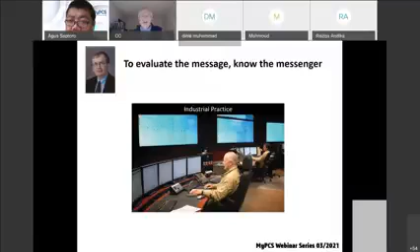In a transition between industry and academia, I spent some time at the Warren Centre for Advanced Engineering in Sydney, Australia, where we performed a one-year study on the benefits of process control and published a book. It was published by the Instrument Society of America, containing 7 industrial case studies, and it took about a year to complete.

Then I went to McMaster University as a professor in chemical engineering. This is a screenshot of the McMaster Advanced Control Consortium. A number of professors collaborate in this consortium along with about 20 graduate students, and we have joint projects with a number of companies. This gives students a great opportunity to interact with industrial practitioners and have case studies in their research coming from the companies.

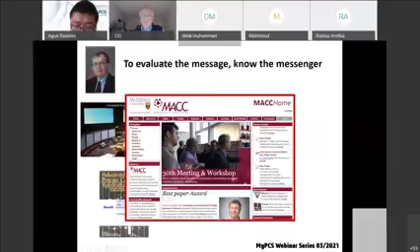While I was at McMaster, and since I've retired, I've been maintaining the Process Control Education website, where you can access my book and e-lessons and other learning materials at no charge. Some topics I'll talk about today are actually covered on this website, but not under process control—under process operability. So when I talk about issues like flexibility, reliability, and troubleshooting, there are chapters and PowerPoint slides, but you have to look under process operability.

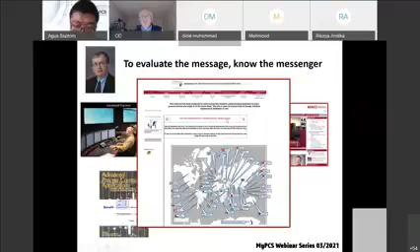What else keeps me busy besides maintaining that? Recently I've been working with Academics Without Borders. This organization goes to developing countries and works with young faculty members to help them build their research and teaching capabilities. That's one of the things I'll be doing next week, working with some groups on their research proposals.

So that's me. That's not the important thing. The important thing is the topic.

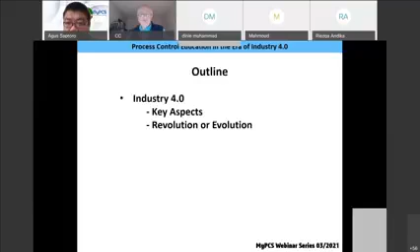In the outline, I'm going to first talk about Industry 4.0. It's a very nebulous thing, it's everything to everybody in some sense. So I'm going to try to pick out the key aspects that might be most important for chemical engineering, and then talk for a moment about whether we're in a revolution or an evolution in the changes to process control.

Then I'm going to talk about the education, and process systems engineering topics, not just control, but design, optimization, and data sciences, and how we can relate these topics to Industry 4.0. Then I'll try to summarize the status and some future steps we could take to improve the situation.

Because wherever we are, we can always do better. And of course, please continue to add your comments and questions in the chat.

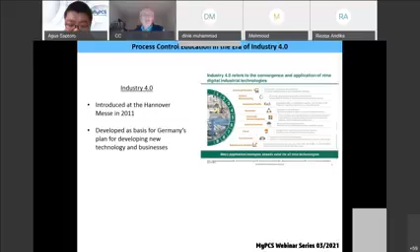Now, we'll look at these topics in a little more detail, but where does Industry 4.0 come from? My best research is that it was introduced at the Hannover Messe, a trade fair in Germany in 2011. It was developed as a guide to set the basis for Germany's plan for developing new technology and businesses. So it didn't come from the academic side, and it didn't come really from the user side, and it covers a very, very broad range of topics.

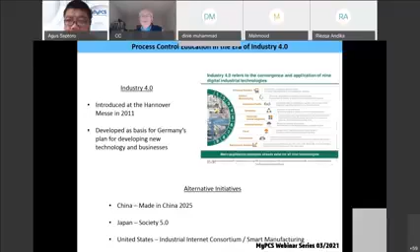There are alternative initiatives like Made in China, Society 5.0, Smart Manufacturing, and the Industrial Internet Consortium in the United States. So when we talk about Industry 4.0, that doesn't mean that's the only definition of what's in the future. We have all these others, and they're going to have to all at some point combine and collaborate, because we have to have systems that are compatible. We can't have competing software and hardware systems - they won't be interoperable.

Okay, so here's one take. This is from the Boston Consulting Group on what Industry 4.0 entails. And it goes, you can see, from advanced robotics to additive manufacturing, 3D printing, and so forth, all the way down to big data and analytics.

Not all of these are necessarily of interest to the process systems engineering community. Some may not even be in chemical engineering. So I'm going to highlight these items: simulation, and under simulation they include optimization - so using simulation for decision making, which can be optimization; the horizontal and vertical integration analysis of the plant; the Industrial Internet of Things, IIoT; and certainly big data and analytics. So these are the four things I'm going to concentrate on.

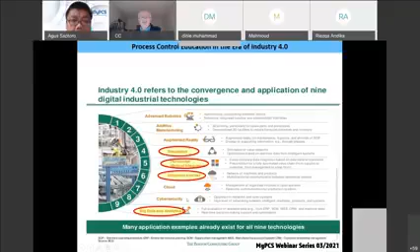Now, things like cybersecurity obviously are very important, but I don't think the chemical engineering community is going to be involved in writing the protocols for that, although we're going to be demanding that the security exists.

So let me relate those to a typical chemical process. First, we have the horizontal integration - that's from raw materials to final customer satisfaction. And Industry 4.0 also talks about customer feedback and dedicated customer product design, so you go in and they take your measurements and then build you a bicycle that fits you exactly. But this is certainly an issue in all of our plants.

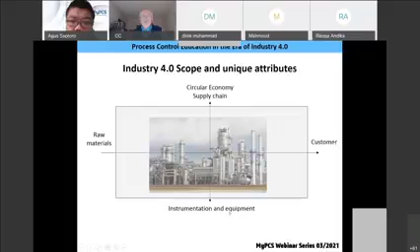There's vertical integration from instrumentation and equipment through supply chain, and they're even considering the circular economy where we collect materials and recycle them back. We don't stop at instrumentation here because now the equipment, the pumps and valves and so forth, will be smart - we'll have processors in them as well.

And to deal with this range of decision making, we're going to have to use optimization, data sciences, control, and simulation. And some of the key words: the Industrial Internet of Things, communication among various pieces of equipment using IP addresses; cyber physical systems, those are physical systems that have sensing and computation, not necessarily control, but computation at the individual physical elements; and in some cases, autonomous agents, although we probably have had that for 150 years with individual controllers that aren't talking to one another. This is going to be a decentralized system.

It's going to have to be interoperable, and that's a key term that industry people use all the time - in other words, we can mix the equipment and software from various sources into an integrated system without having to write special interfacing each time we put a new valve or a new pump into a plant. So interoperability from an economic point of view is extremely important. And the system should be modular and scalable, so we can start small and build up as our plant may expand, or as we transfer from older equipment to newer equipment.

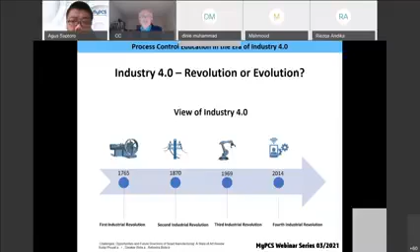But whether it's a revolution or an evolution really doesn't affect anything we're going to do in this talk. So I think there are three stages. We go back to antiquity and up to the steam engine, let's say. Control systems existed, but they were very few and far between, and it was not recognized that there was a common technology.

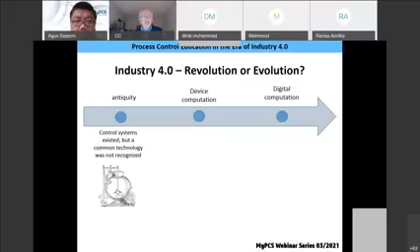It was built well before BC became AD, but that technology didn't develop very much, probably because we didn't need it at the time. So that developed slowly. When we were making pottery, we needed to fire the pottery and control the temperature in the kilns. There were little feedback systems, very clever systems, but they were individual artifacts.

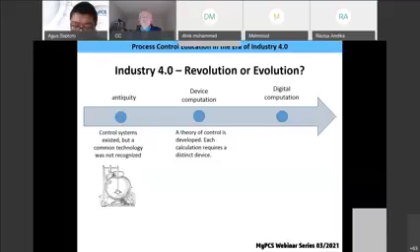Once we roughly came up with the steam engine, we started to develop machinery. We needed much more advanced controls, but each calculation required a distinct device. So that was an enormous limitation to control. However, it stimulated an enormous amount of control theory.

So if we wanted a proportional integral derivative controller, we needed to build an electrical circuit. And if we needed 100 of them, we had to build 100 electrical circuits. That was until we got to digital computation. Once we started to have that, programming opened up.

Simple PID, or MPC where you manipulate 80 or 90 variables—we can do that in the digital machine.

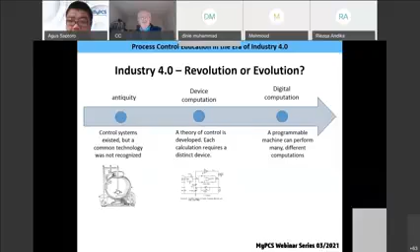So from my point of view, I differ a little bit from the developers of Industry 4.0. I say we're not in a revolution now, using the terminology from Thomas Kuhn and from The Structure of Scientific Revolutions. Thomas Kuhn was the person who coined the term paradigm shift that every manager in the world has overused. Thomas Kuhn talked about a paradigm shift being when Copernicus recognized that the Earth revolved around the sun rather than the opposite, or when Darwin developed his understanding of evolution. So we're looking for big changes, not small changes.

However, normal science is still important. That does not imply that developments are trivial or of any limited value whatsoever.

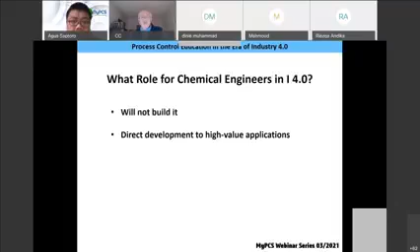Okay, so in Industry 4.0, what's the role of chemical engineers? We're probably not going to build it. We're not going to sit down and write the software or design the electronics for the interface cards or whatever. However, we have to be involved along with other user communities in directing the development to high-value applications. In addition, we're going to develop and deploy the decision-making methods, the ones we have now and the ones we're going to need in the future.

And we're going to emphasize security and safety. I have never met a computer scientist who understands how important it is to run plants safely and securely, and I've had bad experiences. I can tell you when I was in industry, computer scientists would run experiments in process control systems that were controlling plants, and sometimes we had incidents where we would lose $1 million or $2 million because of software errors they introduced just to see what would happen. So it's the chemical engineers who own the plant, and we have to absolutely ensure that the security and safety is provided.

I would say this is very similar to the introduction of digital control in the 60s and 70s. There was a period in which the companies building the new digital control systems weren't entirely sure what they were good for, and the operating companies weren't entirely sure what digital control meant. It took at least a decade to shake that out. The companies that were most successful were the control suppliers that worked closely with a number of leading operating companies.

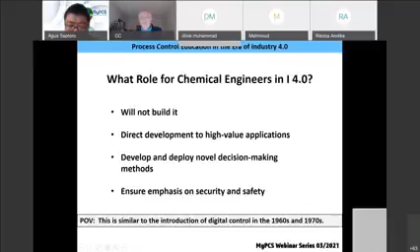Now, process systems engineers are going to be the ones who are going to be doing that for the most part.

So what is process systems engineering? It's fundamental modeling and simulation, process control, optimization, design, data sciences, which is usually not identified explicitly. I just looked at a couple of review papers on process systems engineering published in the last 6 months with maybe 15 authors across the 2 papers, and data sciences was not identified as a central part of process systems engineering, which I think it is central. And reliability is almost never included in process systems engineering, but it's a key technology and one of the reasons why we need Industry 4.0.

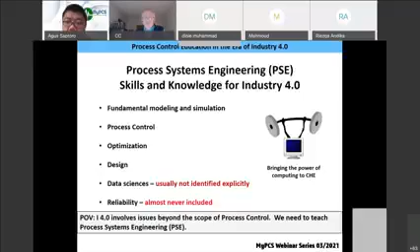So Industry 4.0 goes well beyond the scope of process control. We're going to need to teach process systems engineering to the people who interact with the I4.0 folks, and we're going to need the entire array of all of these technologies.

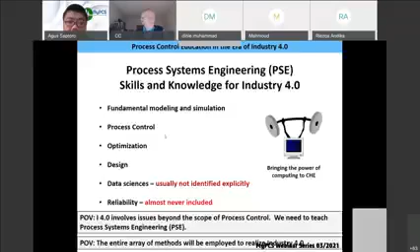So what about the students? This is an opinion, I don't have data on this. A large percentage of the students will need to apply one or more PSE methods in their careers. So even if they're working in biochemistry, they can use data science techniques learned in their undergraduate education. Or if they're going into business, say supply chain management, they're going to need optimization. Only a few percent, maybe 5%, will actually become process systems engineers and follow that career path.

So the principles for Industry 4.0 can be introduced, but not taught in such depth that it requires an additional year or two of training. While teaching the undergraduate topics, we can make the students aware of the needs — the kind of things we need in control, optimization, reliability and so forth — and some solutions that are easy for them to understand, so they'll be ready to adapt when they need to see the advanced technologies in Industry 4.0.

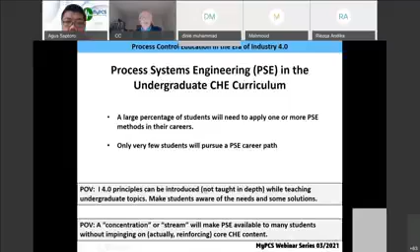The way to do that is a construct I'm proposing: a concentration or a stream that will make PSE available to many students without overwhelming the entire program or impinging on the core content of chemical engineering. After all, only a few are going to specialize, while a large number will require some PSE skills. And of course, while we're teaching this, we're going to be reinforcing the core content. So let's take a look at what that looks like.

I'm not going to show every course in the chemical curriculum — thermodynamics, heat transfer and so forth. I'm just going to show the PSE related courses. Here the yellow are the required courses: a modeling and numerical methods course in 2nd year, a basic statistics course that covers things like regression, design of experiments, a little bit of analysis of variance, and gets into some principal component analysis, so it includes some multivariate statistics in this basic course.

We have a flow sheeting course, an undergraduate process control course, which we all love and think is the most important course in the program, and we have another design course here — economics and process operability. I'll talk about that a little bit more in a second.

Now, there's a couple more required courses that have options. In this program, the design course will have several variants — one may have a biochemistry emphasis, another might have a polymer processing emphasis. There's going to be one design course, the project design course, that has a PSE emphasis. So we're going to have 3 design courses basically: flow sheeting with some sustainability, the project course, and then another course in the middle.

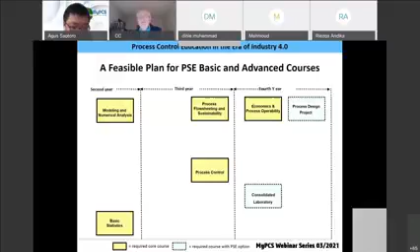Then we have some technical electives. This allows us to offer these courses, and not all students will take them. There are going to be some students who are in love with biochemistry or nanotechnology, and they don't have to take these courses. There's going to be an advanced process control course, a data science course, and an optimization course. Just to give you an idea, these courses average about 50% of the students take them as electives. So out of our class of 80 graduating, we'll have about 40 students on average across these 3 courses.

This gives us the ability to offer some really good advanced content in engineering to a substantial number of students who are very interested in it. One of the ways we sell this to students is to ask, do you know exactly what you want to do? Some will say yes, I want to cure cancer or build an artificial lung. Good. Most don't. So I say, if you don't know exactly what industry you're going into, or whether you'll emphasize management or operations, these systems topics are going to be of the most general value to you.

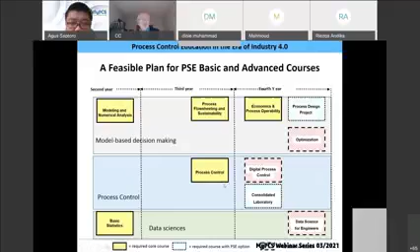Let's look at what's in these courses and what's in the courses now, and how we can teach them so that when students are involved with Industry 4.0, they'll know the principles that are important for engineering that carry over to the Industry 4.0 issues.

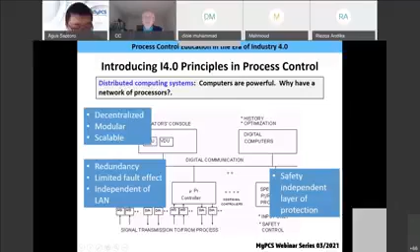We have an independent layer of protection. We know that in our safety hierarchy, every layer has to be independent. If we did the safety in the same computer where we did the control, we wouldn't have this independent safety layer. And we have the options for unique software and intensive calculations that are independent from the control computers.

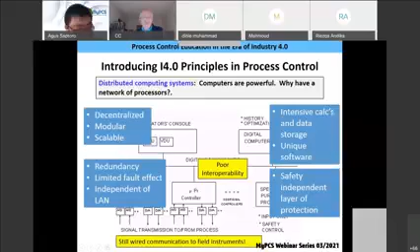There are some deficiencies. We're still wired, so we're still running miles and miles of wires. We can't do that with Industry 4.0. And we have very poor interoperability. If this is a Siemens system, for example, and you wanted to add one Yokogawa controller to it, the cost would be prohibitive. So once you buy one of these systems, you're pretty well stuck with one vendor, and with Industry 4.0 we don't want that to happen. So while we introduce this, we can show all the aspects of it that are important - the ones that are good and we want to retain in the future, and the ones we want to improve upon.

Let's look at a little more detail. This first sketch I'm going to talk about is a cyber physical separation system. This is the way we did it from probably the 1960s until even today. Some systems have this kind of structure, and certainly most of the installed base that your students will see has this structure, so we have to talk about it. That installed base is going to be there for 30 years.

So we have a digital computer, but then we have what we could call a dumb sensor and a dumb valve. What we have is only one variable being transferred in one direction, from the sensor to the controller - the cyber system, if you will - and one variable, the command to the valve, being sent from the cyber system to the equipment.

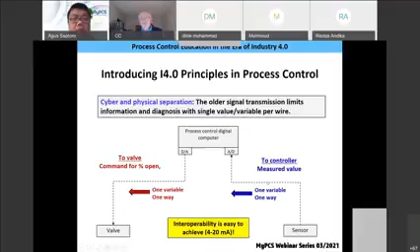Interoperability here is very easy. 4 to 20 milliamps is the standard around the world, or if it was pneumatic, even older, 3 to 15 PSI.

But we don't have really much knowledge about what's going on in the sensor. Is it functioning properly? Is the valve functioning properly? So we lose a lot with this kind of structure, but that's the structure most of your students will see if they go out into the plant today.

So let's look at a cyber physical system. With smart devices, this technology is certainly available and has been for probably over a decade, and it is used in industry a lot, but penetration, given the slow turnover of process plants because they're so capital intensive, isn't enormous.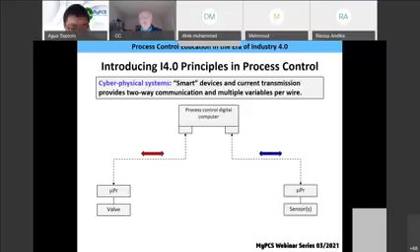Here we have a microprocessor at the sensor and a microprocessor at the valve. There are various ways this can be implemented, HART versus other methods, so I'm not going to get into the details of that. But once we have two-way communication, we can make calculations at the sensor. We can do linearizations, correct for changing process conditions, and have multiple sensors to calculate a variable.

And to the controller, we not only give the measured value, but we can give a diagnostic. Is the power supply working in the sensor? Is the power dropping off so that value might not be reliable?

We can, from the controller, send information back to the sensor. So we can calibrate the sensor, set the zero and the span and so forth. Just being able to do this, rather than having people go out to 1,000 or 2,000 sensors and calibrate each one individually, can save millions of dollars, certainly hundreds of thousands.

Now we have two-way communication. At the valve, we can do flow stem position linearization or other calculations. To the valve, we can send a command, and also a valve configuration like the data for the linearization or limits.

And coming back, we can get diagnostics. Did the valve actually move? If we sent a command to be at 50%, is the valve at 49, or is it at 38 or 22? So we can get the valve feedback position and other diagnostics on the air supply to the valve and so forth. This is a much superior system.

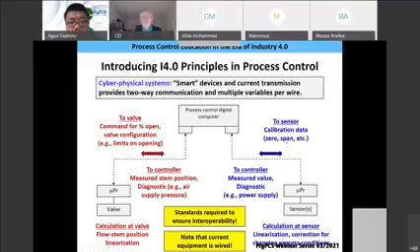Note that we're still hardwired. We're stuck with those wires right now, and that's an enormous expense and an enormous limitation. But again, once the students understand today's system, they can understand the capabilities and the shortcomings.

Now, from the process control system, what about the horizontal integration? When I teach level control, once you understand how to control level, you can put levels in series. These could be distillation towers or other pieces of equipment, each one having an inventory that's being controlled.

And so now we can introduce things like the feed push system. In some plants, we're pushing the feed in and it comes out whenever it wants. Now, this has some limitations.

In North America, we have a feed push system to distribute vaccines for COVID, and it's not a good system. Once we push some material to a bunch of hospitals, over here sometimes we have too little vaccine and sometimes we have too much vaccine. Now, of course, we're dealing with a command economy that's trying to satisfy each of the individual political localities, but it's not the best control system.

So another kind of control system would be a pull system, where we set the flow rate, the production rate, directly, and then we pull material in until we ultimately pull raw materials in. So now we have these two: we have a feed push and a product pull, and once we do that, we can talk about where we need these.

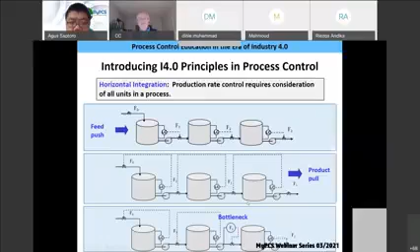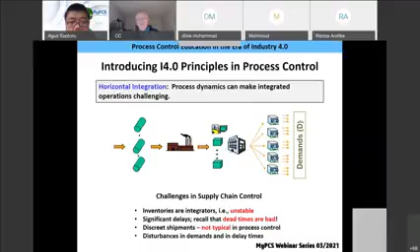So taking our level control lesson and going a little further, we get into horizontal integration. I'm going to skip over this a little bit, just to say I don't teach supply chain in a process control course. But once they can understand process control, they can see that if you have an open loop unstable system with lots of dead times, it's going to be a big problem.

Now, vertical integration, we talk about cascades. So we have a temporal decomposition, the slowest, the next slowest, and then the fastest. And we take advantage of that temporal decomposition.

I just want to point out that that kind of temporal decomposition can be implemented in MPC technology. It doesn't have to be individual loops. You can have individual models for all these variables and an integrated MPC controller that implements cascade control. I think Shell SMOC controller was the first to do that, but others are doing it now.

So once we start looking at the temporal decomposition from process equipment up through scheduling, for example, they'll understand the importance of solving fast problems and preventing disturbances from getting into the slower responding systems.

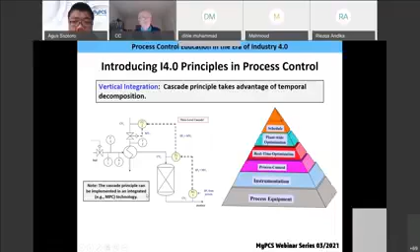But this remains an active area of research to integrate these systems. I don't want to imply that temporal decomposition is a solved problem, even though theoretically you could have the biggest nonlinear MPC in the world. In practice, it's not going to work.

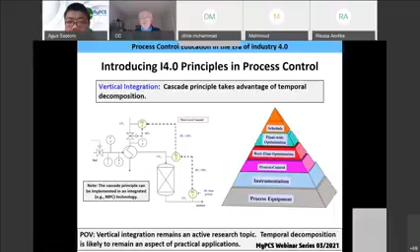Now, what about if we can't measure what we want to control, or the sensor is too costly? Here's a little flash system. We have a couple of heat exchangers, a lower pressure in the flash vessel. The liquid comes out the bottom, the vapor comes out the top. Most students calculate flash calculations in the thermodynamics course, but they never see a picture like this to say, what would it look like? What does the equipment look like? And I'm afraid our thermodynamics instructors are never going to do that, so it's going to be up to us.

Let's say we have this feed, some light hydrocarbons, and we'd like to control the light key as the ethane, but it's very expensive to put an on-stream analyzer with the analyzer house and the sample system. It could run $30,000, $40,000 capital easily.

So let's look for something that's related. Now, we can't do multivariate statistics in the process control course, but we can use our basic chemical engineering knowledge, although we're going to do the multivariate statistics in a little while. So we could use our chemical engineering knowledge and recognize that there's a relationship between the temperature in the flash and the ethane in the liquid.

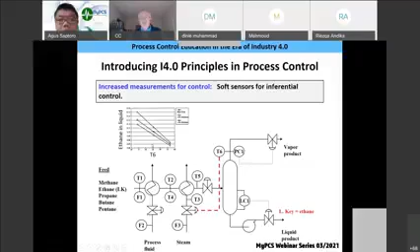And we can analyze that for the base case and for disturbance cases with different feed compositions. And while we know that isn't perfect, if it's going to control ethane within the acceptable limits, we can control the temperature rather than by the analyzer. And in many cases, in practice, we do that.

So once we've taught inferential control, the next step is to say, well, what if it's not obvious? What if from physical principles we can't find one or two sensors? What do we do? That's the next course, that's data sciences, and that sets them up for Industry 4.0.

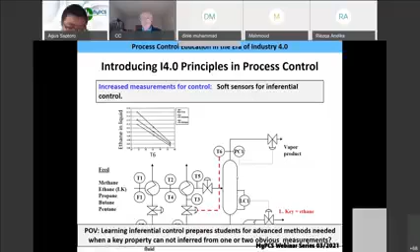And of course, if you get to the point where in the second course you can do centralized model predictive control, then we can look at the value of integrating the horizontal or vertical optimization decisions to get a better overall dynamic performance. So those are some ways that we can modify slightly our teaching and make sure we build the links to the ideas that are important for Industry 4.0.

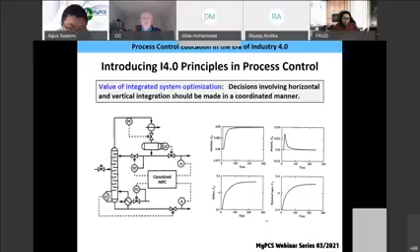Now, what about process design, the process design course? This is an alkylation plant. Don't bother with the details. We have two feeds coming in, a C4 and a mixed olefin stream, and we're going to make an alkylate, and we're going to blend the alkylate then with other components and make some gasoline. It's not a very straightforward process. And if we had time, we could talk about it and talk about the control and everything.

But let's just talk about one thing, operating window. When we're talking about the horizontal integration of a plant, we have to know what the capacity is for each unit, and then what the capacity is for the integrated plant.

Let me go back. We're going to look at some flexibility, changing the production rate and octane of the gasoline, because we have different octanes that we're going to sell.

This is the operating window for that plant. The reds are infeasible, the blues are feasible. This is the blended flow rate in barrels per day, or barrels per batch, and this is the minimum octane, which is basically what we're going to run at with an optimized blend.

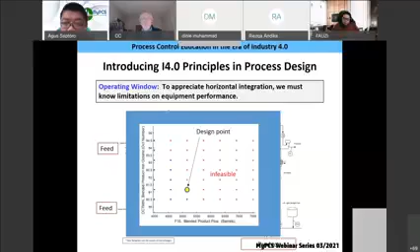Now, just because the operation is feasible does not mean it's a good idea. So there's something called the integrity operating window. The green area is safe operation, good operation, and we want to keep our targets within that.

Then outside that, we're going to damage the equipment. We're going to damage it slowly. Failure occurs with sustained operation in this region. And if we go further out, this could be pressures or temperatures or whatever, failure occurs very quickly. Out here, we could have loss of containment, the vessel would break.

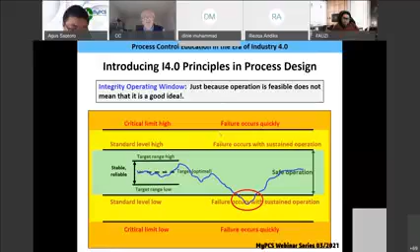Now, if we have some operating data, we have data that looks like this. We see that we've gone outside the green zone, and every time we go outside the green, we're going to accumulate some damage. The more damage we accumulate, the sooner the equipment will fail. So the integrity operating window is smaller than the operating window.

So let's look at an example. Here we have the head curve, head versus flow. This is a normal head curve for a centrifugal pump, constant speed. We teach these to our students all the time.

And we have the best efficiency point. So we tell the students you should run at the best efficiency point, and all the engineers know that. The problem is a lot of engineers run the pumps at low flow rates. Well, it's still on the curve, so what's the problem?

Well, the problem is this is the reliability curve. And as you get away from the best efficiency point, you're going to have very low reliability. So you're going to have low flow cavitation. You're going to damage the impeller so that rather than running 5 or 6 years, this pump over here is going to run 1 year and then it's going to break. You're going to damage the pump.

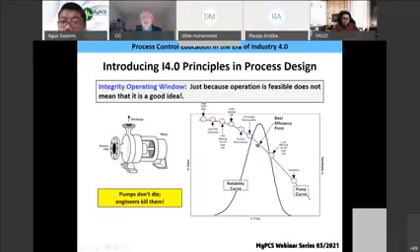So there's an old statement: pumps don't die, engineers kill them. And engineers kill them because they don't understand how a pump works. They've been shown this curve, and that's all they know.

So when we're teaching design, we want to make sure that we teach reliability. In this particular case, if the plant is going to operate at low flows for any sustained period of time, we're going to have to build a control system to prevent the low flows going through the pump. We can do that simply by adding a recycle, and that's very commonly done.

Now, if we're down here for 5 seconds and come back again, that's not going to be an issue. But if we're going to be here for sustained time, we're going to have to add some control systems to prevent that from occurring. So when we're teaching design, we teach reliability.

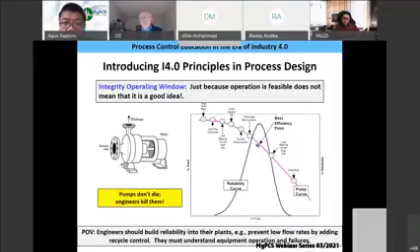We start building what's needed for Industry 4.0. Now, as far as maintenance is concerned, this is a little decision tree that was adapted from NASA.

And down here are final decisions. Let's just talk about the final decisions - if you have extra time later on when you're viewing this, you can stop it and read all the decisions. We can run to failure. Now, we do that with light bulbs in our home, and that's no problem. If the light bulb fails, it's not a main problem. That's not good for most process equipment, but perhaps for some it is.

Then we have design to prevent damage so that we extend the life of the equipment. That's simply like the pump we just talked about, having a recycle around the pump.

Now we have preventive maintenance, interval-based. For example, in your car, you might change your oil every 12 months or 10,000 kilometers, or whatever it happens to be. Spark plugs, 100,000 kilometers.

What if you've got 100 pumps in your plant from different manufacturers, different sizes? How do you manage that whole system? You need the industrial Internet of Things. You have to know how much time each machine has been in service, when it was maintained, which parts were replaced, etc., for all your 100 pumps. In addition, you have to know that for all your valves, compressors, and sensors. Obviously, that's not something you want to do with 3x5 cards. So there's an opportunity for the Internet of Things to improve preventive maintenance.

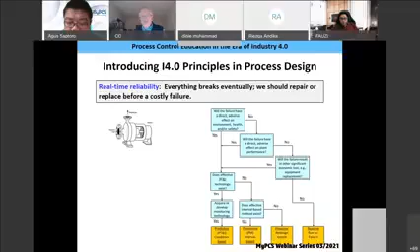Now, what about predictive maintenance? We have equipment, and we don't want to do this on an interval basis. Something may go wrong at any particular time, and we'd like to know if it's an incipient failure. It's going to fail in the future, but we'd like to know that so we can schedule maintenance before any damage occurs or any lost production occurs. So we can make a smart pump.

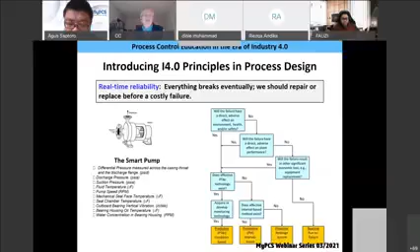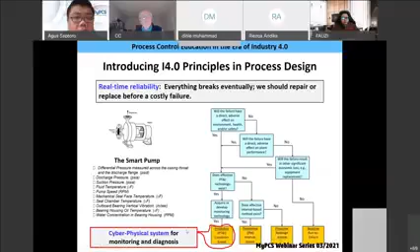We can measure all these things in the pump, put a processor on it, and have it communicating in real time with the Internet of Things system, the Industry 4.0. So cyber-physical systems for monitoring and diagnosis are obviously very, very important. We can introduce these for some obvious ones. Later on, we're going to talk about the data sciences approach to this.

And finally, one more example of cyber-physical systems: most equipment can be enhanced with measurements and computation. This is a chiller in the McMaster boiler house. We're really cold here in Canada, so we have boilers, and occasionally it gets warm for about a month and a half in the summer, so we need air conditioning. We have these industrial chillers, and we send the cold water to all the buildings from a centralized control room.

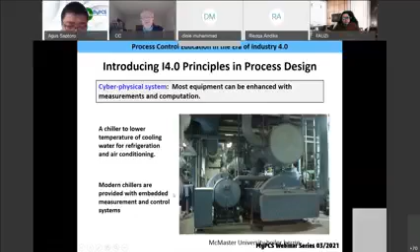We use this as a chemical engineering laboratory, depending on the instructors. When I was teaching some of the design courses, students would come in here and learn about equipment because it's industrial scale, and you can walk around and touch it. So this chiller is just cooling water for air conditioning, but modern chillers are provided with embedded controllers. What we want to tell our students is there are business opportunities—whatever you're building and whatever you're doing, there's a business opportunity for making it smart and beating the competition.

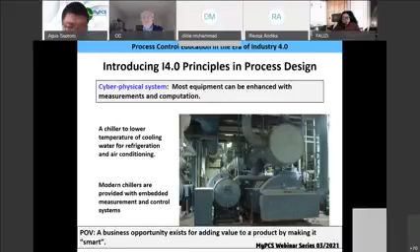Okay, so another topic in design that we teach is troubleshooting.

I remember when I first went into industry and looked at some drawings, I said, my God, why are we measuring all these things? So I would go find somebody older than me who knew, and I'd say, why are you measuring this? Why are you measuring that? Pretty soon they got tired of me and wouldn't talk to me for a while. But we need those measurements so we can monitor the health of the system.

We measure delta pressure across the trays so that, even though we can't look inside, we can infer the hydraulics—the liquid and vapor flows in the tower—in different sections. We're also measuring pressure here, even though there's a pressure controller, because we want redundancy. Pressure is the key variable, so we want redundant measurements we can compare.

A tray temperature—this isn't a heat exchanger, so why are we measuring temperatures in the middle of the plant? Well, of course, there are inferences: if it's a boiling hydrocarbon or boiling multi-component system, that gives us an inference of the composition in the tower.

And we can measure the liquid level in the condenser. Why would we do that? Well, this is a flooded condenser, so we cover part of the heat exchanger with liquid, and that changes the heat transfer duty. If we want to condense more material, we reduce the liquid in the condenser, giving more area for condensing. If we want to condense less, we close this valve a little and fill it up a bit, giving less area.

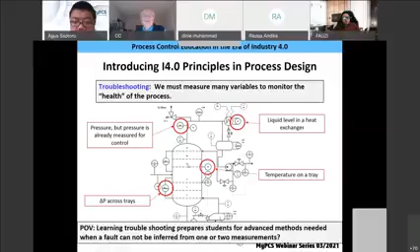So we need all of these sensors to monitor the health of the process. Once we understand those basics, then what if there's a fault that isn't obviously sensed by one or two sensors? Well, that sets the students up for the advanced technology in Industry 4.0.

I'm going to spend just a couple of minutes on this troubleshooting because I think it's an important aspect of education that is not given enough attention. The University of Michigan, Fogler teaches this, and we've spent a lot of time at McMaster developing the teaching approaches.

So if we have a current state and we think there may be a problem and it's not time critical, we're going to do our troubleshooting, we're going to fix it, and we're going to return to operation. If it's time critical and it's only moderately time critical, we're going to go to a safe park situation. There's been a lot of research done on what a safe park is, but you could think of it as reducing temperatures, reducing production rates so that the equipment is in a more stable operation. Go ahead and troubleshoot, fix the problem, return to normal operation and go.

Or if it's highly time critical, we're going to have to shut the plant down. There's something really wrong. The pipe is broken. We think there's some material, some fuel that's being released. We've got to shut it down immediately. Then we troubleshoot, then we fix the problem, and then we have to start the plant up again before we return to normal operation.

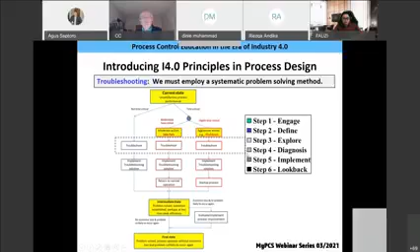And then the troubleshooting follows one of any number of different troubleshooting approaches. We use the 6-step Don Woods approach, but there are other ones around, and this one certainly works very well for us. For example, we have maybe 30 or 40 cases that we use in teaching. So this is just a little example, one of the simpler ones, I'll run through very quickly.

This is a physical system. We have some liquid in a tank where we have 2 pumps. We have a spare pump, of course, because if we need reliability, we need a backup, and one of them will be in operation at a time. And then we have a flow control that adjusts the valve here. And we have pumps A and B.

And so we would tell the students, they work in groups on these problems: Pump B is working very well, and we can see the flow is at its set point, and the controller output is in its range between 0 and 100. So that's what's being sent out by the controller. And we're very happy, everything's working great.

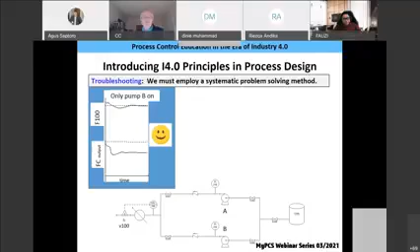Now we come along and the maintenance engineer says, I want to turn B off and run A for a while so we sort of balance the amount of time in operation for both pumps A and B. We don't want to run B all the time until it fails. We turn on pump A and turn off pump B, and things don't look good. The controller output goes all the way up to 100%. It's a fail-closed valve, that means it's fully open. And the flow isn't getting up to the set point.

And then we ask the students to troubleshoot this problem. They can ask questions, and they'll be given succinct answers to reasonable questions. So they might ask, is the liquid here down too low and we're sucking air or vapor into the line? And then we'd say, okay, well, we just looked at the level sensor, and the level is at 70%, and the takeoff is down to 5%.

Then they might ask, well, what about some of the valves here? So maybe somebody forgot to open one of these valves. And we come along and say, no, all the valves are open. And then ultimately, through the troubleshooting, they would conclude that the operators left these two isolation valves open, and the one-way valve here has failed, and it's failed open.

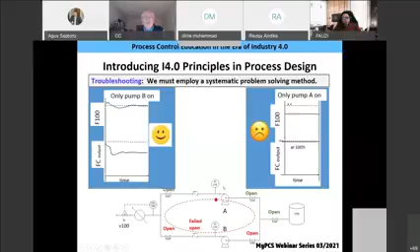So what we have here is a circulation. A lot of the liquid, rather than going out in this direction, is circulating around and around. We're losing head in the pump, and we can't pump as much material as we want. So these are the kinds of things that happen in troubleshooting.

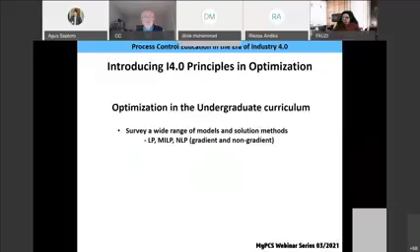So we'll move on to optimization very quickly. The optimization course looks at a wide range of models and solution methods: LP, MILP, NLP. It emphasizes converting the problem statements into solutions. We make use of available software tools like Excel, MATLAB, and GAMS, and really emphasize explaining solutions in engineering terms, sensitivity analysis, and so forth.

And the students, once we get to projects, the students are allowed to define their own projects, and they love that.

So what's the first problem that almost everybody does? Even mathematicians do this - they do the gasoline blending problem. That could be because Exxon Corporation, way back in the 50s when they were known as Standard Oil, published a book on linear programming before most engineering faculty knew anything about it, and one of the problems was the gasoline blending problem. It's become famous, I guess. It's an interesting problem in its own right, and certainly important for chemical engineers. So that's nice for us, bad for the mathematicians.

So the first thing we do is we give them a simulator of the system, and we say, okay, I want you to make 7,000 barrels of gasoline meeting these specifications and maximize profit. It sounds like a pretty easy problem. There are specifications, maximum and minimum, octane, RVP, and volatility, and with a simulator you think you could do pretty well. We give them half an hour, and most of them will find a feasible solution. Almost nobody finds the optimal solution.

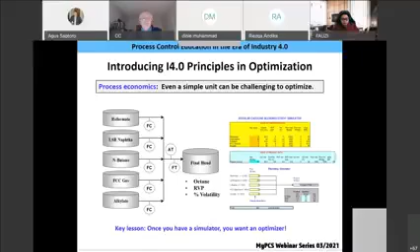What's the lesson? Once you have a simulator, you should want an optimizer, because you don't want to run thousands and thousands of cases to find a good solution. So optimization is essential for the full benefit of the models that we all have. That's an important lesson for them.

We want to be able to explain their solutions and look at sensitivity. So for that blending problem, if we change the production rate from the base case down and up, at a certain point going down, the system becomes infeasible. And going up to over almost probably 8,000, it is feasible. So even a simple unit can be a challenging problem.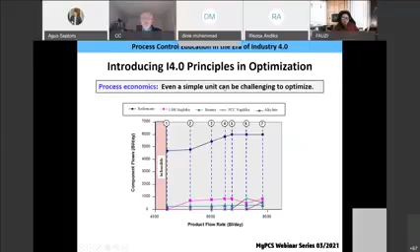And here's, again, a horizontal integration problem. This was a very, very simplified petroleum refinery - a project that the students would solve in about 3 weeks' time. This is a crude distillation unit, a reformer, and a catalytic cracking unit. So it's a very, very simplified problem. They have various feeds that they can buy, and they have different operating conditions, and this was set up as a linear programming problem.

So this is the kind of problem that enables them to think about operating several units in sequence in an integrated manner. We see that some of the materials can either go into a product or into a reactor and then to products. Really important for them - if they're going to deal with Industry 4.0, they need to understand operating decisions.

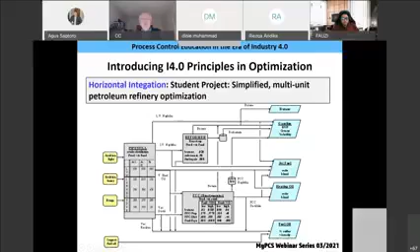Now, data science - luckily with data science, the advanced course does regression, principal component analysis and partial least squares, cluster analysis, and neural networks. So a very advanced course really for an undergraduate level engineering, again emphasizing converting problems into solutions.

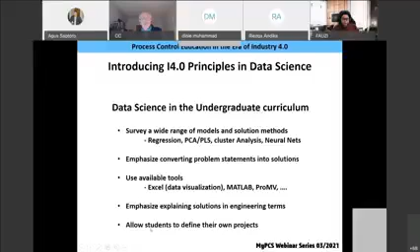Available software is Excel, MATLAB, ProMV, which is a product, a spin-off product from McMaster. It's a commercial product, and it's also the basis, I think, for some of the work that's done by Aspen Technology. Again, emphasizing the solution, explaining the solutions, and allowing students to define their own projects, which is very critical for the satisfaction of the students.

So we need to build a model that suits the application. We need causal models for optimization and for process control, and here we need to have a cause-effect relationship. When I change this valve of the fuel, I need to know the effect on temperature out of the heater. When I change the flow of normal butane, I need to know that effect on the octane, the vapor pressure, percent volatility, and so forth. These have to be causal models.

So when you're building data-based models, in some cases they're going to be causal. In others, they're correlation-based models, sometimes called prediction models. So for an inferential soft sensor, when we build soft sensors, when we do process diagnostics, we need correlation-based models. The distinction here is really critical, and for some reason it takes a while to get people to understand. I have seen industrial cases where people have built correlation-based models and then tried to use them in optimizers, and found, gee, the results were going in the wrong direction - we're not optimizing the plant.

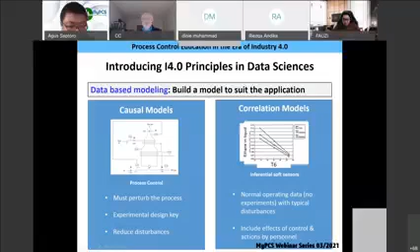We have to take the data under the conditions in which it's going to be used in the future. So if there are control systems and actions by personnel, we can't avoid those. We can't turn off the controllers. They all have to be in there when we're building these models.

So reduced-space models are really easy to understand if you're talking to a process engineer. If we had 1,000 sensors, how many directions, how many independent things can happen? Well, the feed flow rate can change, the feed composition can change, maybe the cooling water temperature can change. This is really a low-dimensional system. Only a few things can change.

And if we went from 40 sensors to 100 sensors, the complexity of the plant is not changing. So we know we should be able to represent this with a few variables, but not a few measurements, a few latent variables.

In the data I'm going to show you, there were about 40 measurements on this distillation tower. Now I can't draw in 40 dimensions, so I'll draw in 3 dimensions and show data that are in 3 variables, but the data really falls in a plane of 2 dimensions. So even though there are 3 measurements, the data is highly correlated. In reality, the data from these 40 measurements would go down to, I think, about 3 latent variables.

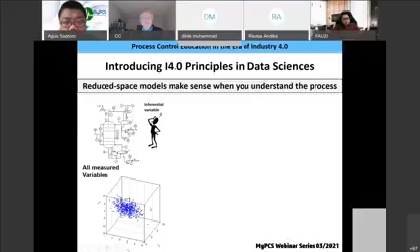So using multivariate statistics, we can determine the latent variables and look at our operation in that latent variable space. And then we can build an inferential model that uses all the measurements to find the latent variables and relate the compositions to the latent variables, and ultimately to all of the measurements with different weightings.

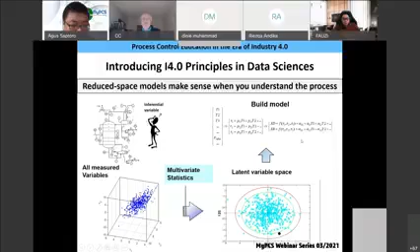And does that work? Sure. This is if we didn't have any inferential control. This is the percent benzene in the feed, so that's a common disturbance. And this is the deviation from 0 between the actual and the predicted product quality. So this would be perfect - that black line is perfect. If there were no inferential control, we'd have big deviations.

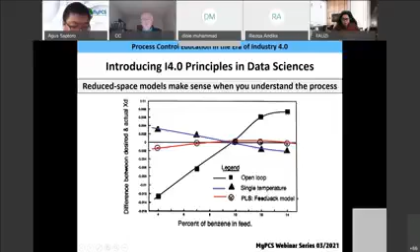If we use 1 temperature, we would get this line, and the red line, much, much better, is using multiple temperatures, using the multivariate statistical model.

Okay, so in summary, what are we doing reasonably well? Math modeling and simulation, especially flow sheeting. Introduction to advanced methods and tools, especially if you have these courses in place - process control, optimization, data sciences. Open-ended projects and advanced courses. We're doing all of these things reasonably well.

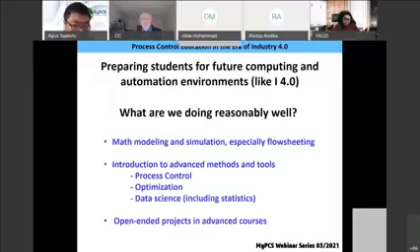What can we do better? The complexity of plant-wide operation and control, vertical and horizontal integration. To a great extent, our design courses do flow sheeting and cost estimation, but they don't talk about how these things operate. We need to think about how they operate so that we can take advantage of the tools and the vertical integration in I 4.0.

Increase coverage of equipment and instrumentation, and especially their faults. If we want students to understand that fault diagnostics are important, we have to teach them that equipment fails, and we don't do that very well right now. We want to introduce reliability as a topic in the design course, or somewhere else in the program, and troubleshooting. And we want to emphasize the importance of safety and security.

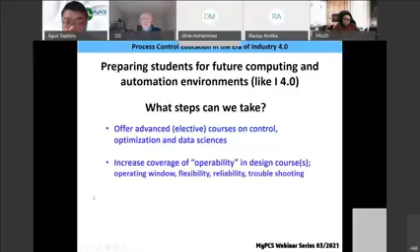So what steps can we take? Offer advanced elective courses on control, optimization, and data sciences. Increase the coverage of operability in the design courses. More content on equipment and faults. Now, quite often instructors say, well, I don't know this material. Well, we could get some guest instructors to help in that regard.

And then become aware of the initiatives in Industry 4.0 and build explicit links in the courses. So when we talk about this, we started off with: here's the current distributed control system with smart valves and smart sensors. It has lots of good capabilities, but it has some limitations - it still has wires. If you teach that, even if you don't say 'in the future there's going to be something called Industry 4.0,' they're going to be capable of making that jump.

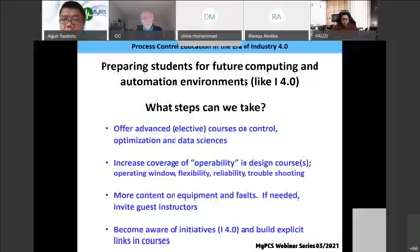So that's my wrap up. I'd be happy to hear your questions, your comments, your opinions, objections, whatever we might want to talk about. This is my email, and this is the link to the process control website that also has some of that operability and design material in it. So could we move to questions now?

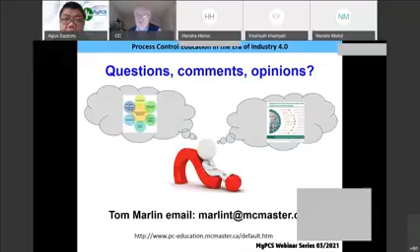Thank you, sure, that's a good question, and it's always a challenge that the students don't completely understand. Usually the way the course is run, students break up into small groups of 2 or 3, and then they write a very short proposal, maybe no more than 1 page, explaining their problem and also giving an idea of where they're going to get the information, the models they're going to develop, the chemistry or whatever it happens to be, or where they're going to get a data set if it's a data science course.

And then it's a negotiation process with each individual group. By the way, usually I would give maybe 5, 10, or 15 sample projects, and they could choose one of those, or develop their own. The majority want to develop their own. But for their own projects, we have to look at it and say, is it challenging enough? Is it too simple? That's not usually the case. Usually they don't recognize it's much too difficult.

So we have to pare the problem down and make sure they can get the data. In a few cases, I have to say you have to come up with a different problem, it's just way too difficult. But if they're solving a problem with continuous and integer variables, for example in an optimization, I say the minimum you have to do is solve the continuous variable problem, and that would be good enough for your project. A stretch objective is to add the integer variable solver to it. So we give them a base case, a good outcome, and then a stretch outcome to work towards.

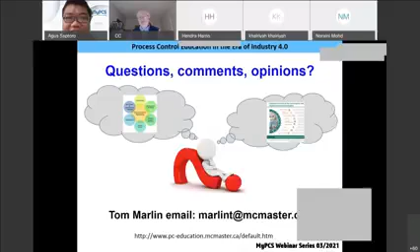It's midnight in Hamilton, yes. Okay, so once again Professor Marlin, on behalf of MyPCS and everyone here, thank you very much for your availability. Well, thank you, and I enjoyed this. Sure, and hope that we can have you again in the near future for another topic. Oh yes, that would be fine, but not a difficult one. This one was too difficult, Agus, you tricked me into it. Sure, so once again, thank you very much on behalf of everyone.